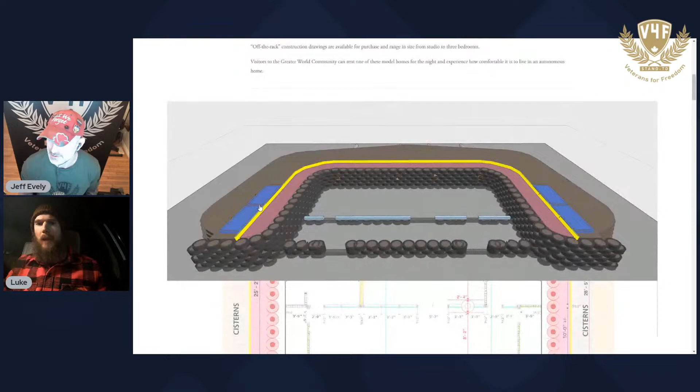Yeah, so I didn't go the route of actually buying the Earthship plans. The way Michael Reynolds designed these buildings, one of those 6 pillars you mentioned, garbage management, designed materials to be taken out of the waste stream, like bottles, cans, tires, and actually used as construction materials. So you build the big load-bearing retaining walls for the structure that retain the earth berm that you bury your house in for thermal properties. Build those out of old tires that are rammed full of earth,

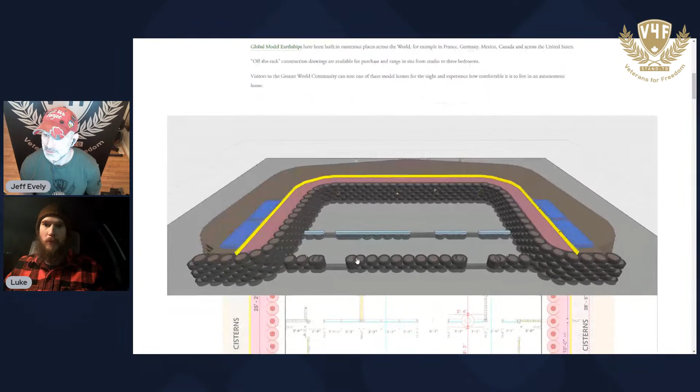and that's actually quite a labor-intensive process. I mean, it's great if you have a lot of bodies, a lot of time, and you don't have a lot of money. You can get the building materials for free or for really cheap because it's a waste material anyway. Yeah. And you can make a really sturdy structure out of it.

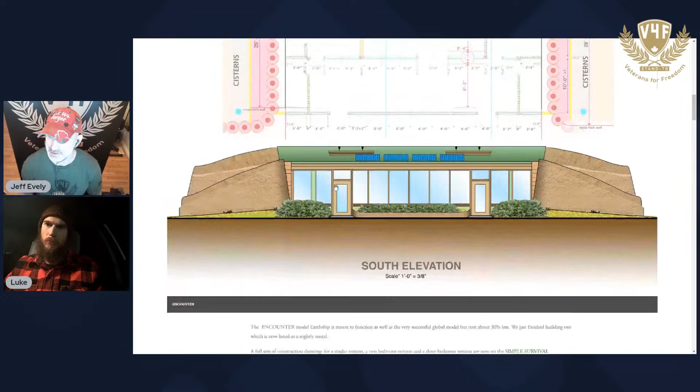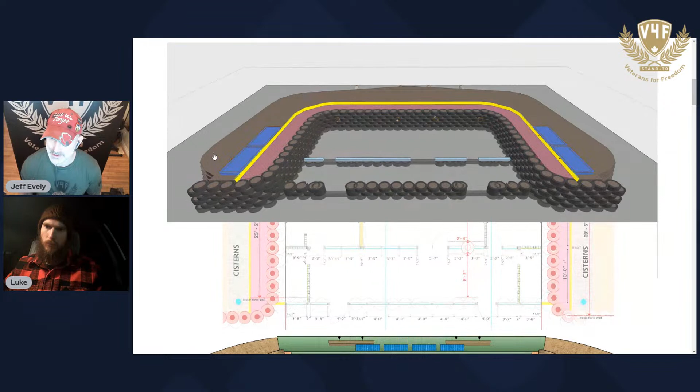So I was just going to point out for our viewers here what they're showing in these diagrams. I don't know if you can see it that well or not, but these are tires. They're using tires to build the walls, and it looks like they're filling them with earth, and around the outside you can see they've built up the earth around it. So it's an interesting, very simplistic idea, at least.

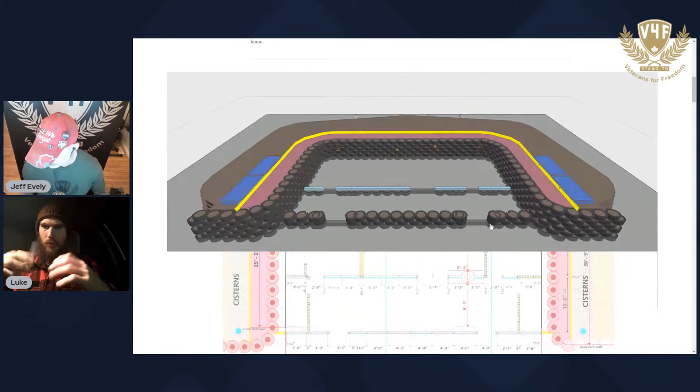So that open end that you're looking at there faces south if you're in the northern hemisphere, because think about the angle of the sun during the seasons as it changes. In the summer, the angle of the sun is much higher, shining high and straight downwards. And as you get into winter, the sun gets lower and lower on the horizon.

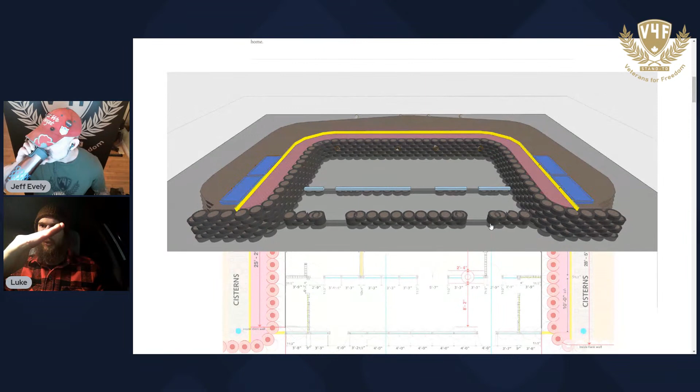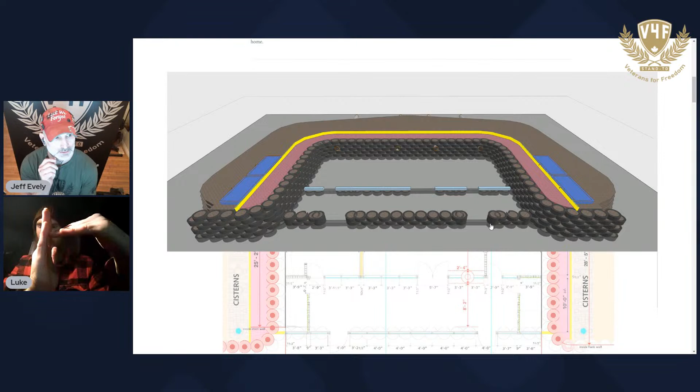So if you think about the angle that the sun would be shining, if all of the front of that structure was greenhouse glass, and the sun's shining in on it at a near perpendicular angle, then it's shining past that glass, and it's hitting your concrete slab that makes up the floor of your house. The sun will heat that up during the day, and like a road does at night in the summer, it stores the heat, and it'll re-release it into your house when the sun sets.

Okay. And is concrete the preferred material for that then? Is it because of the R value it has or something? Well, it's not about R value. This actually uses a different principle than R value. It's thermal mass. So you need R value underneath the concrete for sure, because I'm doing a couple layers of foam board R10 insulation, and that'll prevent the ground from sucking the heat out of the concrete.

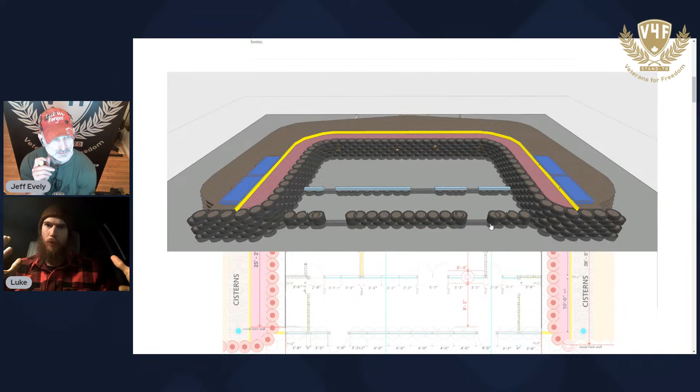Got it. So that 4-inch concrete pad that you're walking on throughout the day will just get shone on by the sun, and it'll store the heat, right? Okay. And then you've insulated that pad from the ground using your R20 insulation. Yeah.

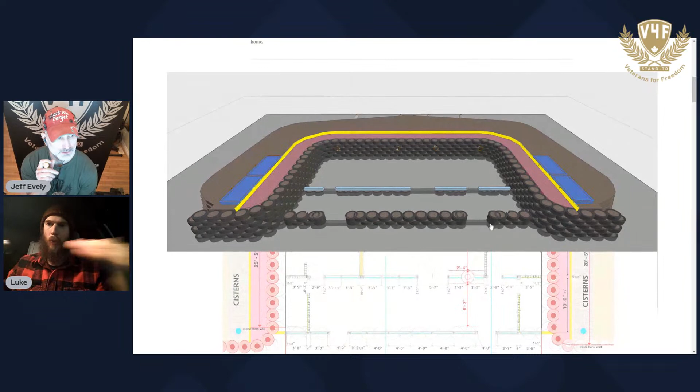The north, the east, and the west walls of your structure are actually backfilled. So you build them on the level of the ground, you build it up, and then you bury it after the fact. Right. So that allows the earth to envelop your structure, and the only side that's actually open to the elements is the south face and the roof. So it's nothing but sunshine coming in there. That's all. Yeah. And that's a neat idea.

You just kind of dig out your little spot in the earth there. And I guess it's more like, what is it called? The specific heat capacity, I guess, of concrete. Like it'll probably absorb the heat of the sun fairly quickly, and it's going to release it at the same rate that it was absorbed. So if it absorbs throughout the course of the day, then it's going to take the course of the night basically to release it. Except the nights are going to get a little bit longer, I guess, in the winter.

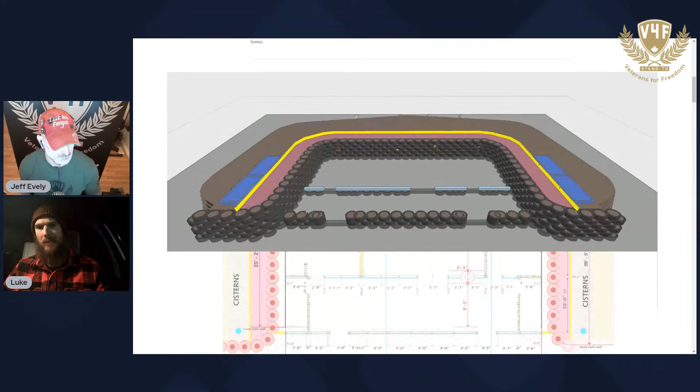So what do we do for that time of year? So, good question. I've borrowed a lot of ideas from Earthships, but a lot of the systems and ideas in the house are my own. One of the concepts I'm playing with is the idea of a rocket stove mass heater that fires a wood-fired radiant floor.

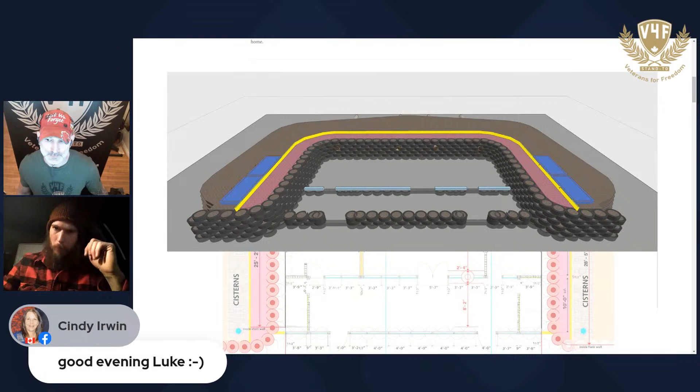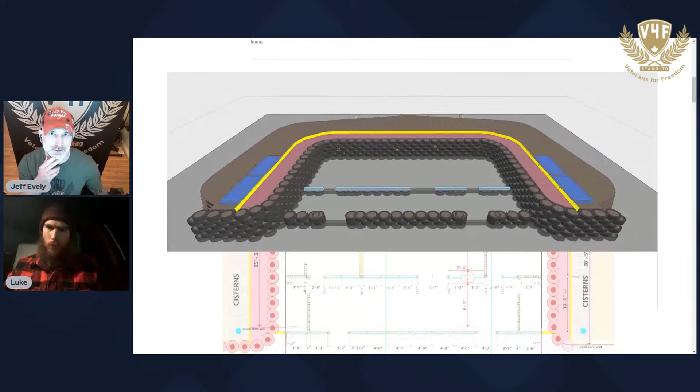So basically, the front of your building there is all greenhouse glass, and the front third of the building is all going to be greenhouse. So I'm going to put this mass heater, this rocket stove, in the greenhouse. And Jeff, are you familiar with mass heaters? Do you know how they work? I'm going to say no. Go ahead and let me know, because I was just about to ask what you meant by a rocket heater. It almost sounds like kind of like a tiger torch or something that just is stationary.

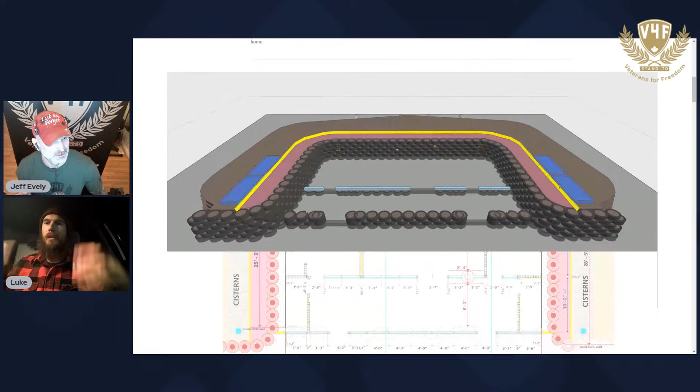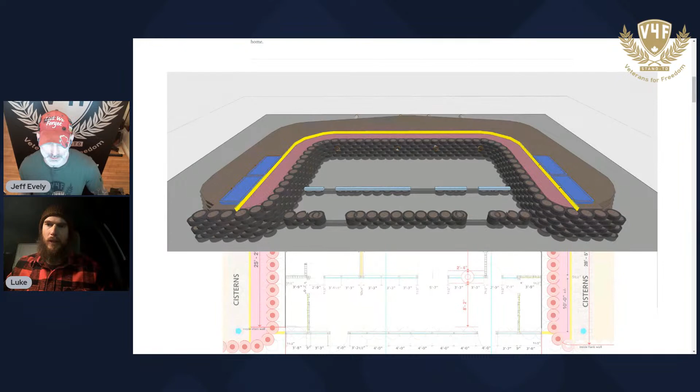It's a type of a wood burning stove that's designed in such a way that once it gets going, it creates its own suction air currents. Okay. So it's like a self-stoking fire, and they burn very, very hot. So you can load a couple of armloads of wood into it, and it'll burn at 1,500 degrees.

And so basically what I'm going to do inside that combustion chamber is I'm going to have coiled copper pipe, and I'm going to run through a pump. I'm going to run glycol and water through that copper pipe, and it's going to be heated by the rocket stove as it burns, and that hot water is then going to get pumped into the radiant floor system. So on days when I don't have a lot of sunlight and I don't have a lot of solar gain, I'm still warming up that concrete pad using fired radiant floor.

Okay. And if you design the system well, the coiled copper pipe that you're using as the heat exchanger inside the rocket stove, if you design the system right, you can potentially push all of that fluid through the system just using the heat of the stove. The convection.

It sounds like kind of a similar, I guess, principle as oil hot water. Like it just kind of forces the hot water through the system in an oil hot water system, I guess. But is that kind of what you're describing here? Like there's a fluid element to it where you're using the glycol and whatnot to hold heat and to circulate the cold fluid back into the system for reheating and stuff like that. So it's something like that, is it?